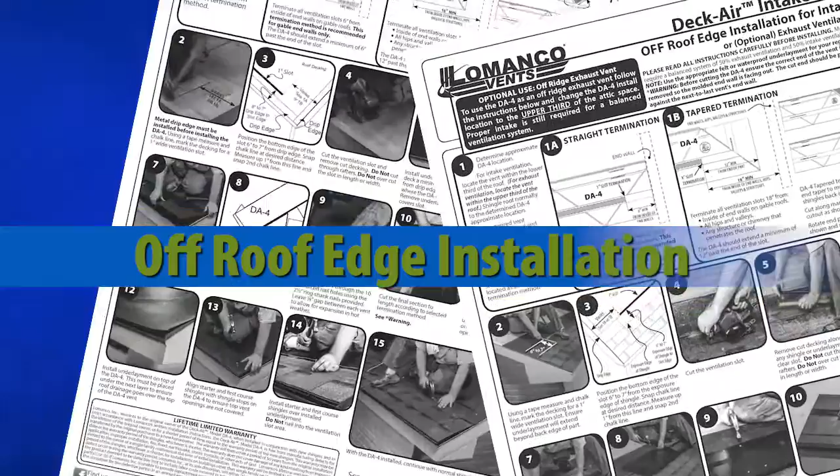Installing the Lomanco Deck Air Model DA4 Shingle Over Intake Vent Off-Roof Edge Installation. Be sure to read, understand, and follow all instructions while installing the Deck Air intake. Always follow your local building codes. This short video highlights a Deck Air off-roof edge installation.

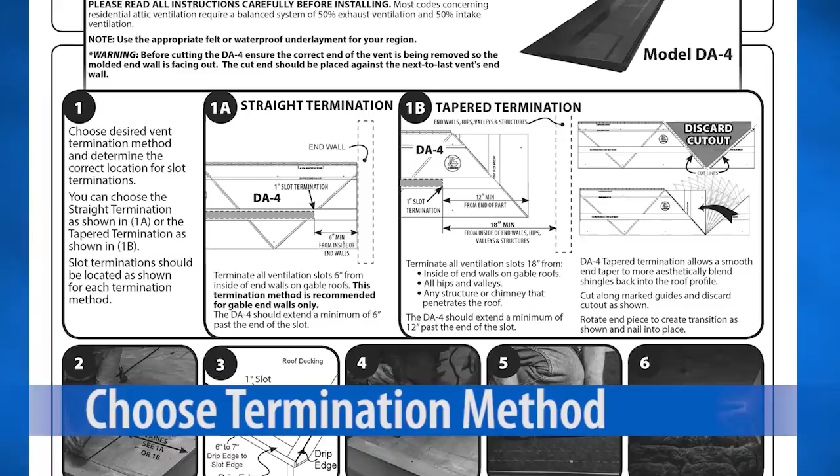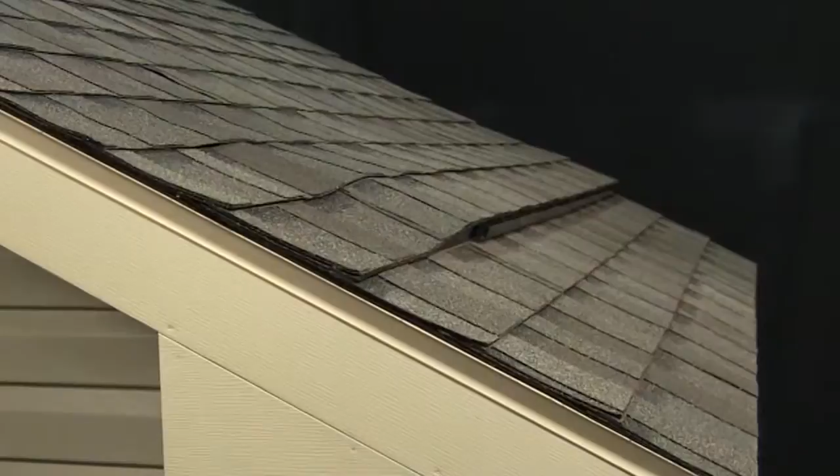The first step is to choose the termination method to use. There are two ways to terminate a run of Deck Air intake vent. There is the straight termination method, which is just like it sounds. The Deck Air vent is terminated with a straight cut. You also have the option of a tapered termination method. This option allows a smooth end taper to more aesthetically blend shingles back into the roof profile.

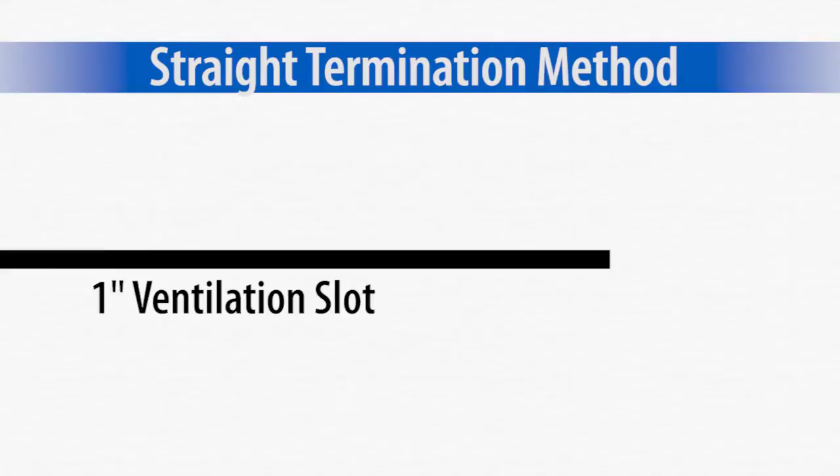The straight termination method is recommended for gable end walls only. When using the straight termination method, terminate all ventilation slots 6 inches from the inside of end walls on gable roofs. The Deck Air vent should extend a minimum of 6 inches past the end of the ventilation slot.

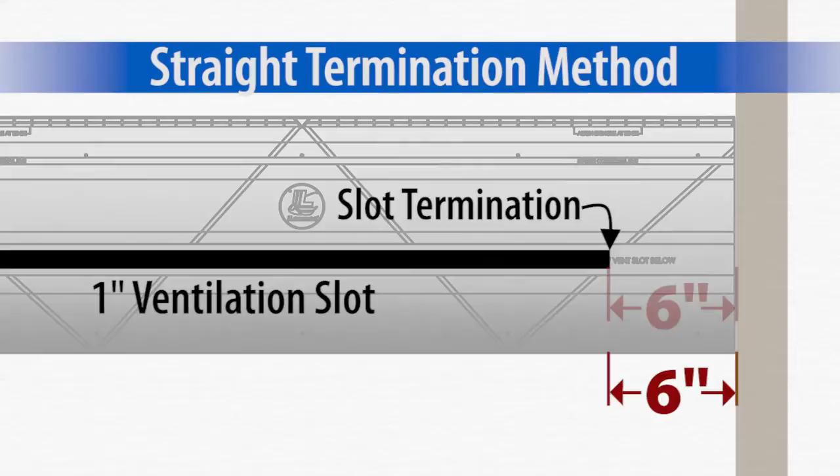To create the tapered termination, cut along the marked guides and discard the cutout. Then rotate the end piece to create the tapered transition. Nail the end piece into place.

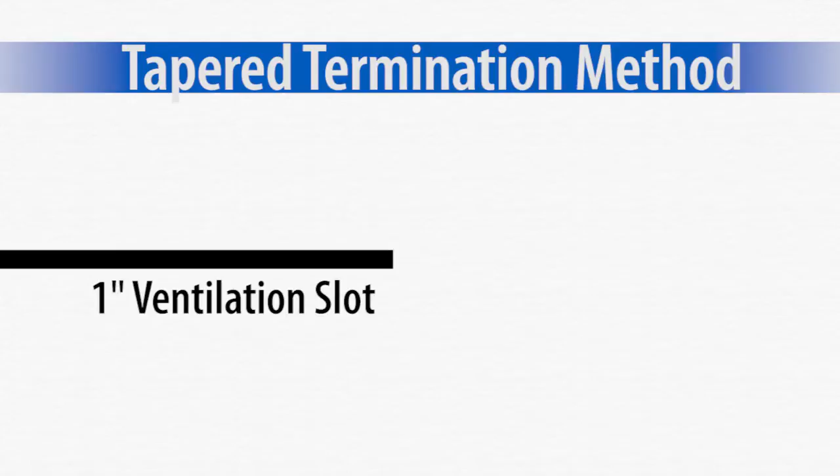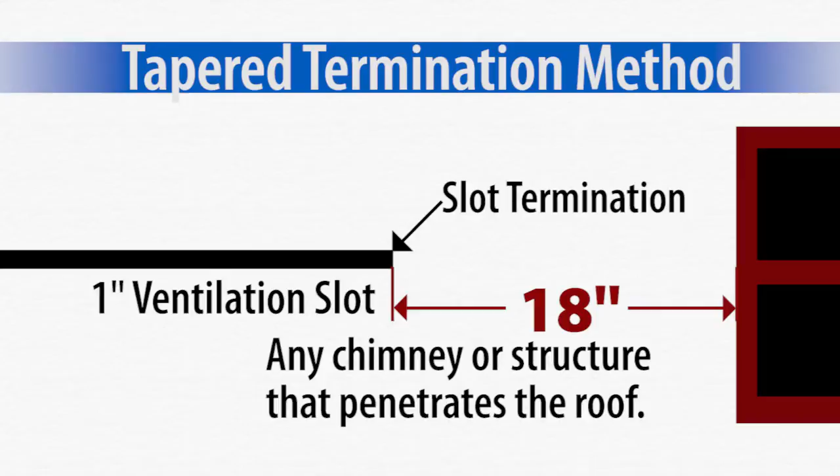When using the tapered termination method, terminate all ventilation slots 18 inches from the following locations: the inside of end walls on gable roofs, all hips and valleys, any chimney or structure that penetrates the roof. The Deck Air should extend a minimum of 12 inches past the end of the ventilation slot.

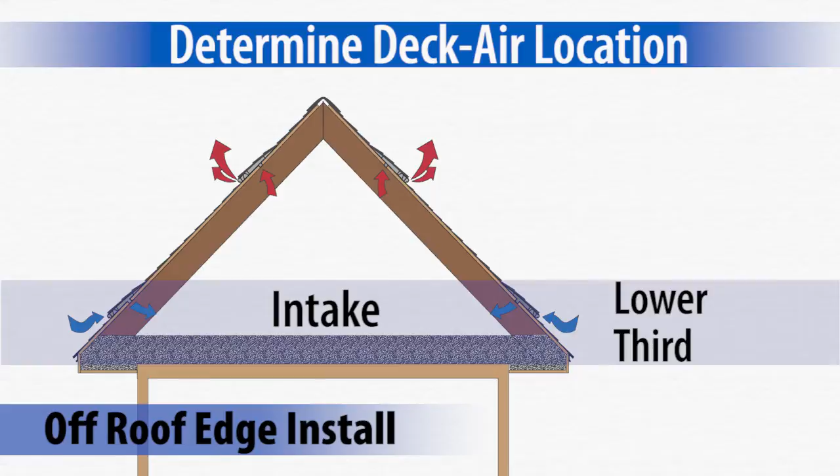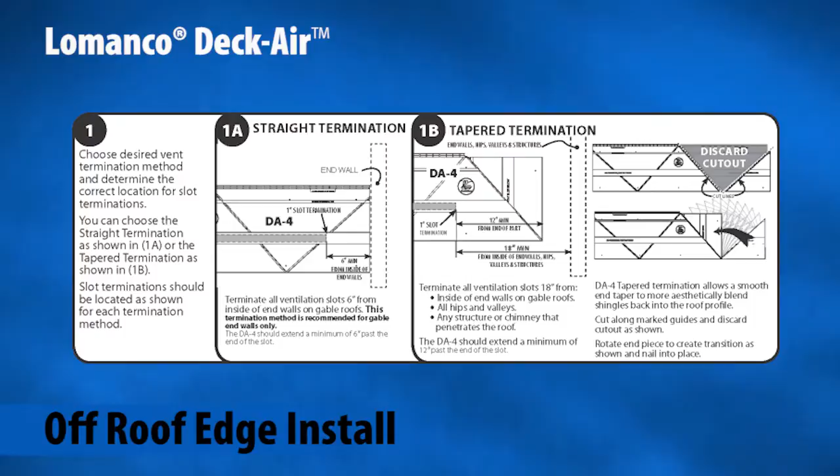For an off-roof edge installation, determine the approximate Deck Air location. For intake ventilation, locate the vent within the lower third of the roof. For optional exhaust ventilation, locate the vent within the upper third of the roof. Shingle roof normally to the determined Deck Air approximate location. Choose desired vent termination method and determine the correct location for slot terminations.

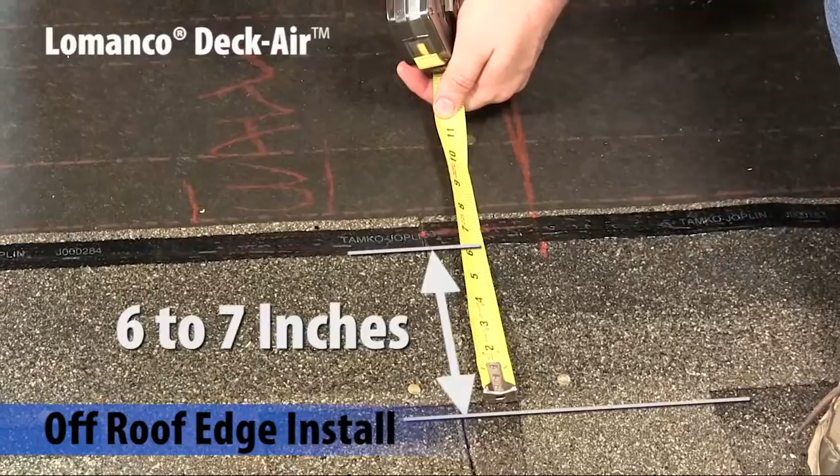Using a tape measure and chalk line, mark the decking for a 1-inch wide ventilation slot. Ensure underlayment will extend beyond back edge of part. Position the bottom edge of the slot 6 to 7 inches from the exposure edge of shingle. Snap a chalk line at the desired distance. Measure up 1 inch from this line and snap a second chalk line.

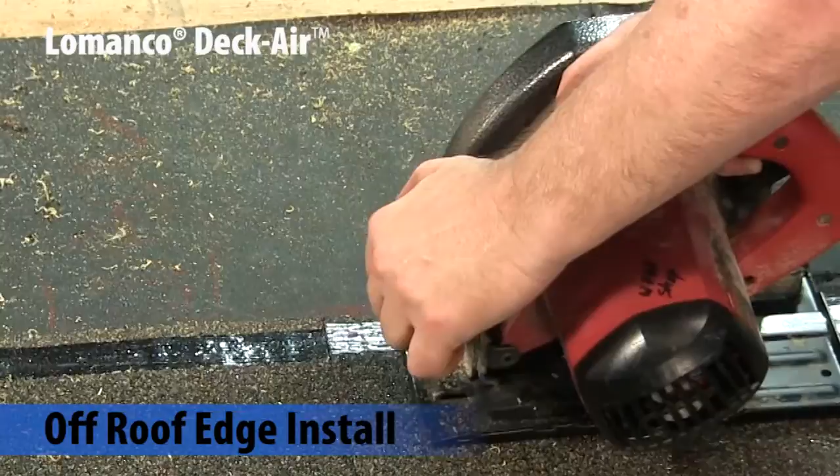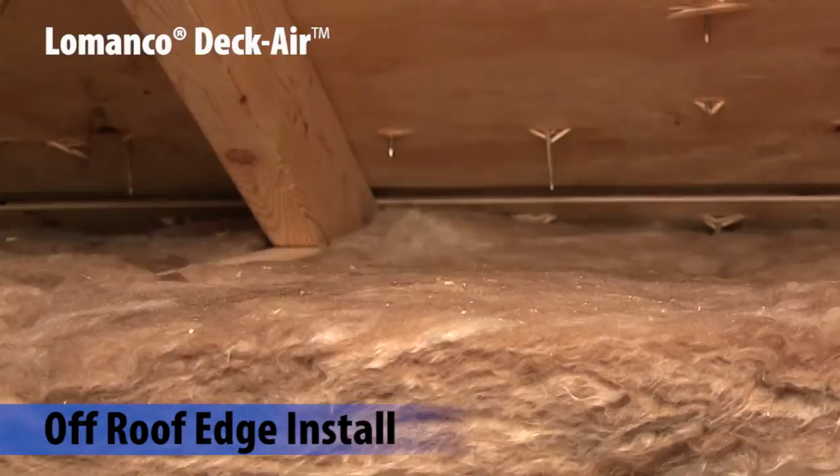Cut the ventilation slot. Remove cut decking along with any shingle or underlayment to clear slot. Do not overcut the slot in length or width. Do not cut through rafters. Ensure the insulation in the attic is not blocking the slot or the flow of air into the attic space.

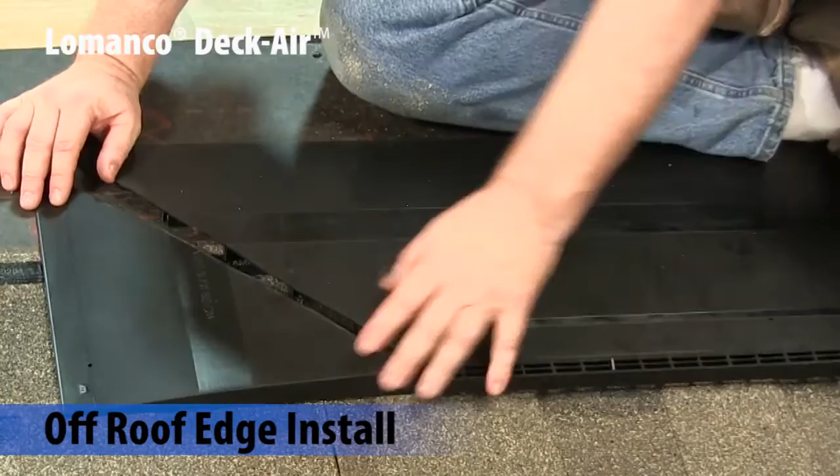Install the Deck Air intake vent over the ventilation slot using the termination method chosen. The tapered termination method is being shown. Align the lower front edge of vent with the exposure edge of shingle. Fasten the Deck Air intake vent through the 10 reinforced nail holes using the 2 1/2 inch ring-shank nails provided.

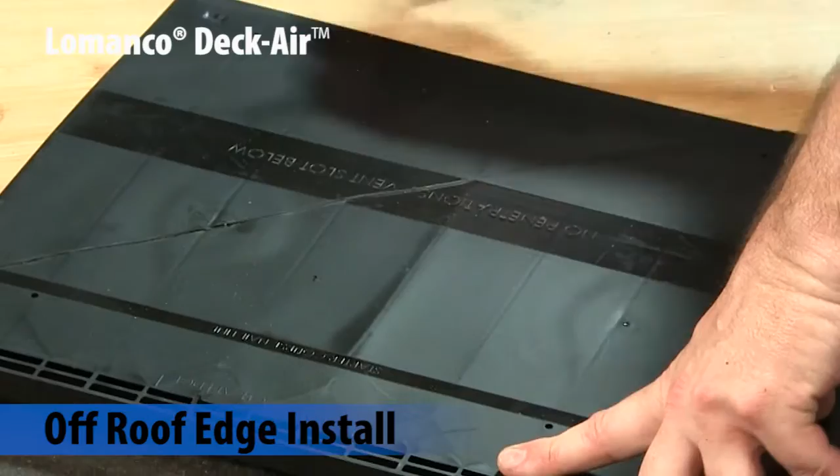Leave a 1/8 of an inch gap between each vent to allow for expansion. Cut the final section to length according to the selected termination method. Align the bottom edge of underlayment or felt with the shingle stops on the Deck Air to ensure none of the top vent openings are covered.

Install underlayment or felt on the top of the Deck Air. This must be in place under the next layer to ensure roof drainage goes over the top of the Deck Air vent. Align the starter course and the first course of shingles with the shingle stops over the Deck Air to ensure none of the top vent openings are covered. Do not nail into the ventilation slot area. With the Deck Air intake vent installed, continue with normal shingle installation.